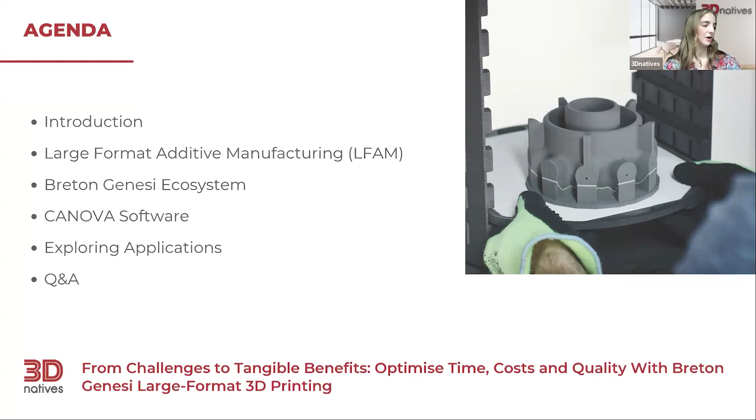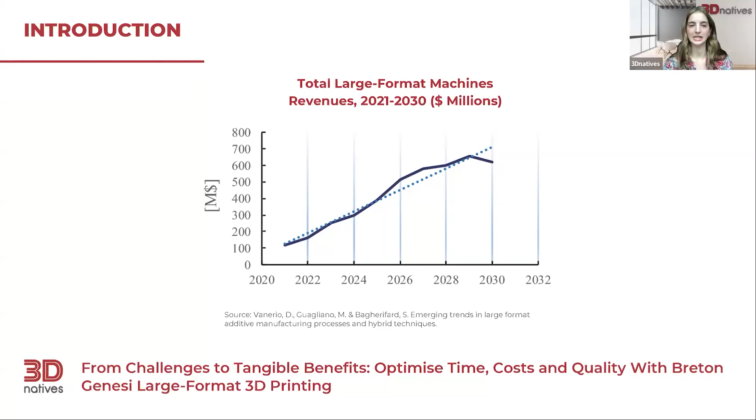Anyways, large format additive manufacturing really has a booming market. As you can see from this graph, the total large format machine revenue from 2021 to 2030 has been growing by the hundreds of millions every year. This is really a technology that's in demand, it's rapidly evolving, and it's applicable to so many diverse industries, from aerospace to automotive to construction. All of these industries seeking large, lightweight, and durable components are turning to large format additive manufacturing. So it's very exciting to be at the forefront of this technology and explore everything it has to offer.

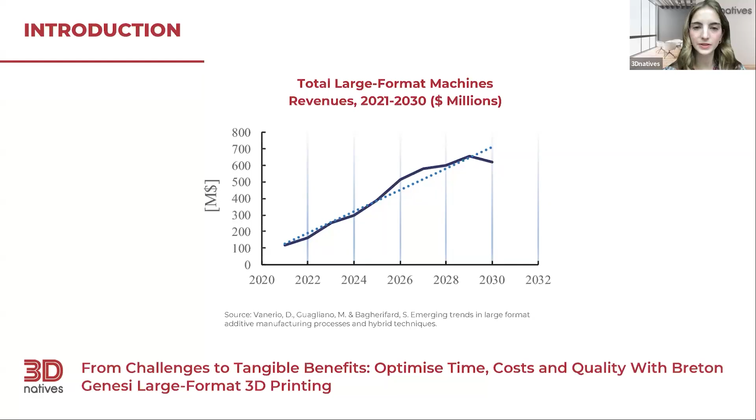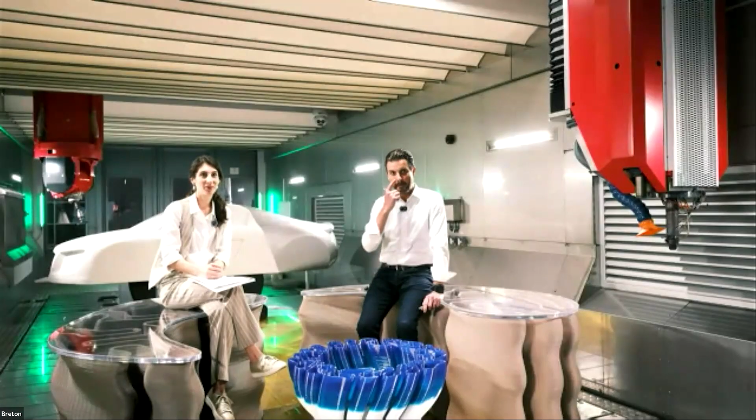Thank you so much, Julia, and thanks everyone for taking the time to be here. Today we're diving into a fast-evolving field that's really catching the eye of the manufacturing world, which is 3D printing, especially in its large-scale applications with thermoplastic materials. But before we dive in, let's go over some common definitions. So what do we mean by large scale?

We define large-scale additive manufacturing not just in terms of size of the machine, but also of industrial applications, part size, throughput, and production environment. It's not only for prototyping, but also aimed at production-ready components. We're referring to additive FDM processes, fused deposition modeling, primarily with thermoplastic pellets reinforced with carbon fiber or glass fiber.

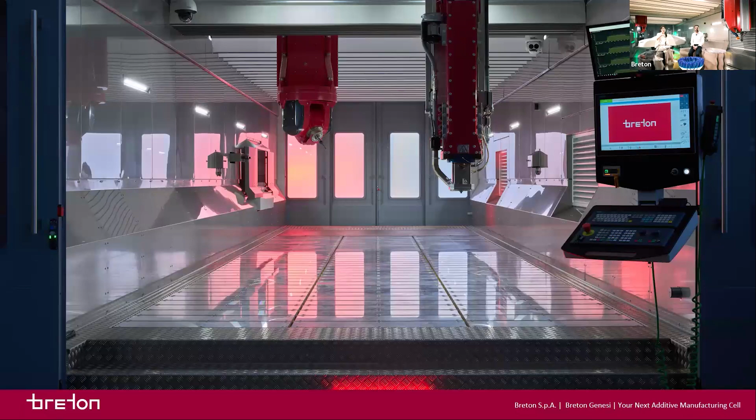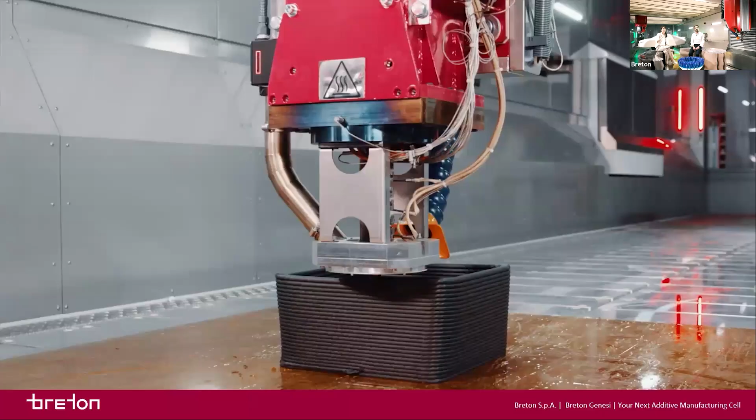We are broadcasting from inside our own additive manufacturing center, which is much larger than the studio I was renting when I was a student. This is our largest 3D printer. It's modular and capable of printing parts with dimensions up to 30 meters long, 5 meters wide, and 2.5 meters tall. The extrusion capability goes up to rates of 200 kilos of material per hour.

We call the system Genesi because we were inspired by the concept of endless possibilities of creation. Breton combines expertise in vertical high-speed machining centers with state-of-the-art extrusion technologies. These systems can be pure additive or hybrid, so additive plus subtractive technologies in the same machine.

This technology is a real game changer in many sectors, from aerospace to automotive, opening up new possibilities for both production and design. But Enrico, could you give us a general overview of the current state of large format 3D printing, and in your experience, what are the main drivers behind its growth?

Thanks, Oriana. Hi, everyone. I'll do my best to provide a good insight into large 3D printing, or LAM, large additive manufacturing, because the demand for these technologies and systems is really booming in several sectors of industry, like aerospace, marine, automotive, precision engineering, and including architectural and design.

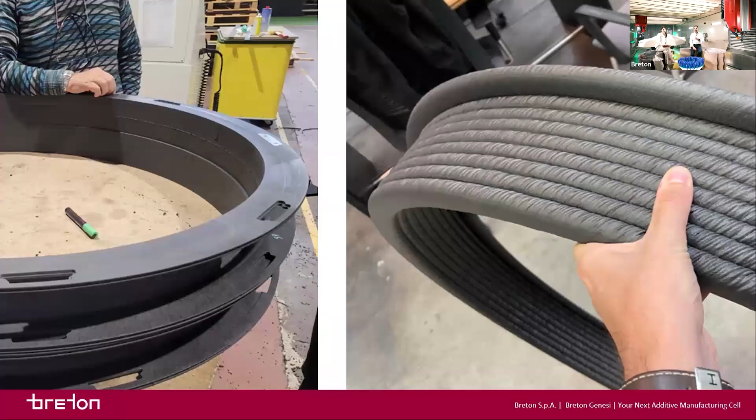Another important point is improved printing quality. With our solution, we are extruding larger beads, like the ones you see now on the slides. This makes the layers more compact and solid, which improves the mechanical properties of the parts and gives better surface quality, even after milling if needed.

Plus, being able to make monolithic parts with intricate geometries opens up new possibilities for design and functionality, particularly compared with the traditional way of producing large parts as assemblies of multiple smaller components, which is quite a tricky job most of the time.

And let's not forget sustainability. Using less material means less waste - this is quite obvious. If I can print my large tooling in-house, for instance, I can also cut a lot in transportation and logistics. All of these aspects are fascinating and full of potential, but sustainability in particular stands out to me as one of the most promising frontiers of additive manufacturing.

For instance, in Breton, we have been actively exploring this dimension, experimenting with the extrusion of recycled biocomposites, such as the ones where we are sitting now. And we will see some other examples later on.

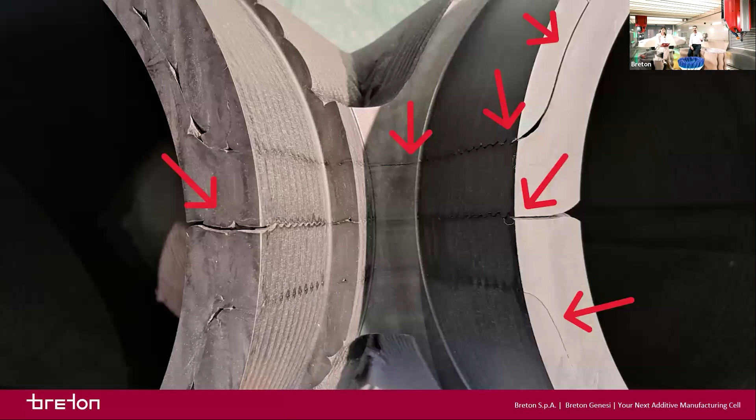Well, you're perfectly right. Despite all the advantages of large format additive manufacturing, there are of course some challenges when it comes to adopting LFAM with thermoplastics. In fact, one of the main ones is managing the extrusion process at a large scale. It's a thermoplastic extrusion process, so you need well-defined and stable parameters throughout the print cycle to get reliable results. If parameters like extrusion speed, temperature, or how the machine handles corners are unstable, you can get geometric defects and lose mechanical properties.

Also, a lot of solutions on the market tend to overlook things like fluid dynamics and temperature management of the deposited materials, often leaving these critical aspects up to the operator's experience, requiring skills that, let's be honest, are not very easily available out there. That makes it quite difficult to bring it to high quality results.

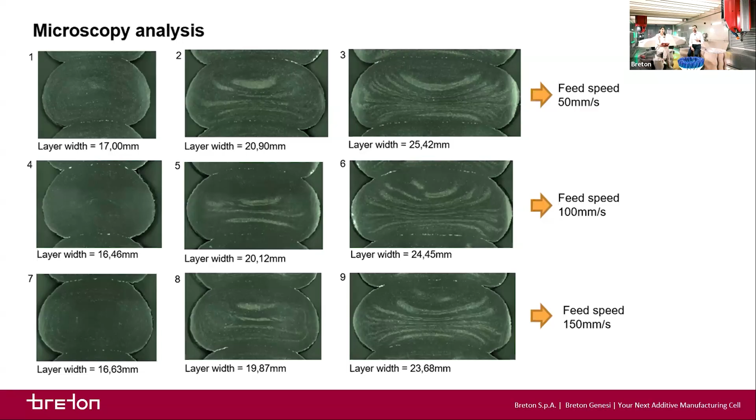Another challenge is also about the preparation and all the phases before getting to the print model, especially in professional 3D printing. It's what we call the ability to make a good design for printing. Designing a mold, for instance, should define from the first input how the machines should behave or how the printed layers should go on the machines.

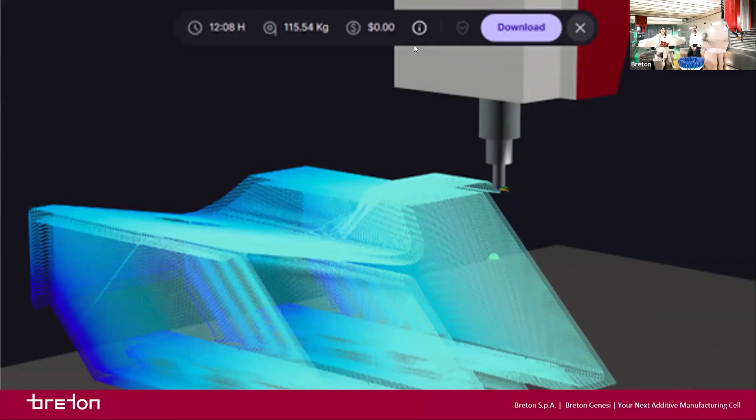And finally, I think it's important to remember that large-scale extrusion isn't just about size or material quantity. It takes also quite a lot of research to produce parts that could be competitive, both in terms of performance and cost. One of the first things I learned in my career is that the process drives the outcome. So it's crucial to manage the extrusion process to get results that are at the same time consistent, high quality, and competitive.

And how does the Breton Genesi solution tackle these challenges that are relevant to so many industries? Exactly, Ariane. Breton comes from a solid experience in vertical machining centers for many different materials, including the most exotic composite materials, and combines it with extrusion technologies at the state of the art. With these joint skills and joint experience, we developed a range of products dedicated to large additive manufacturing with thermoplastic materials. Genesi isn't just a machine or a regular FDM printer. It's what we define as a real ecosystem that integrates machine learning algorithms and advanced artificial intelligence systems, all with the scope to optimize the additive manufacturing process.

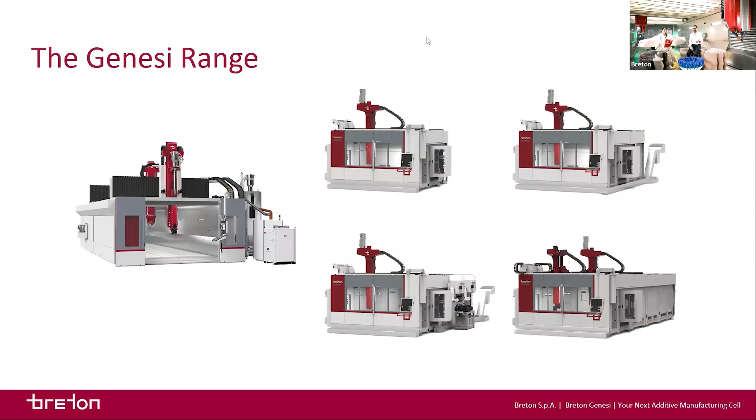So I'll stop you right there because it sounds all very nice, but everyone today is talking about AI and machine learning. So it would be useful if, in practical terms, you could explain how Genesi truly helps to overcome the challenges we discussed, harnessing AI and machine learning for issues like parameter management or process complexity.

Yeah, you're absolutely right. Theory is great, but what matters is how it works in practice, right? So let's go into it and see how the Genesi system works. Let's follow it along with these slides too.

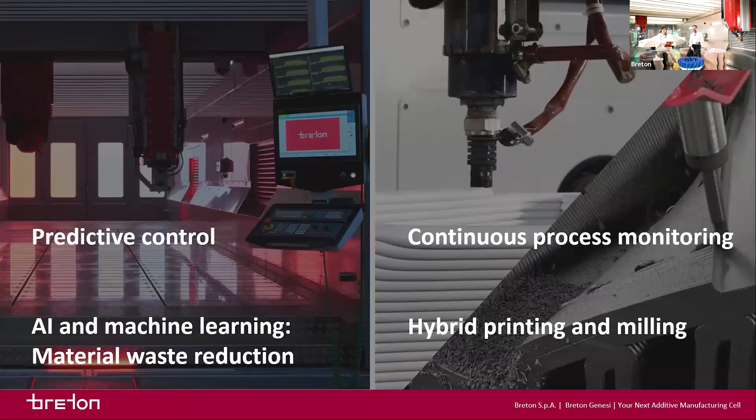As we mentioned, the Genesi system uses artificial intelligence and machine learning to make printing better and more reliable. In practice, this means the machine doesn't just follow the standard instructions from the design software. It goes a little bit further, bringing the experience of Breton technicians and customer print results into the application of new prints. Essentially, Genesi learns how to always get to the best outcome. So even before printing starts, the machine can predict and optimize the print instructions. And if something unexpected happens during the print, Genesi can also adapt and correct the settings on the fly without you having to step in.

Let's look at a concrete example. If you're printing an object and, for any reason, the conditions around the part are changing—the temperature, the proximity to other parts, the humidity, or whatever—Genesi notices right away and automatically adjusts parameters like printing speed, material flow, layer adhesion temperature, and so on.

This way, it always gets high quality results in a stable way without manual interventions. Let's take another example.

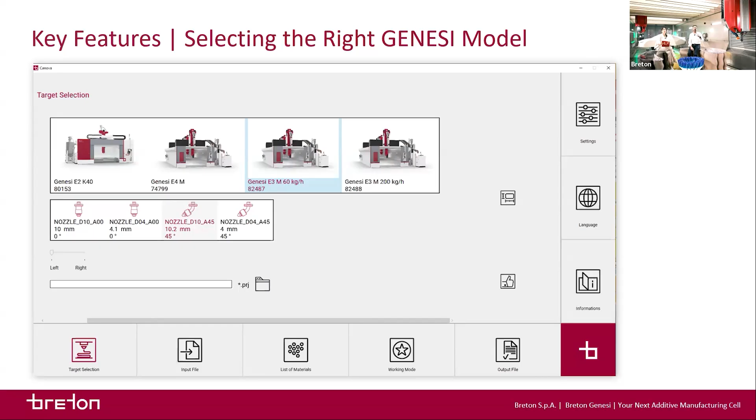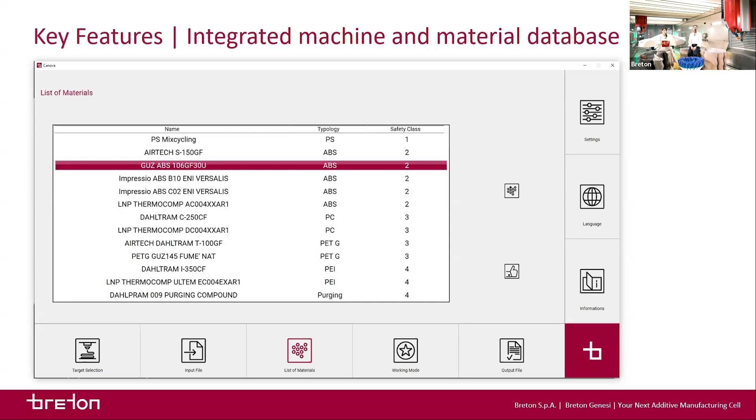How does Canova help the operator? It's really simple, essentially in the form of a wizard that the operator can easily follow. The operator just imports the layer path from the slicer, then picks the material from a ready-made database without losing time defining the parameters because they are already there. The operator also selects which type of nozzle to use, choosing between different sizes and angles that we have, and then the software takes care of everything else.

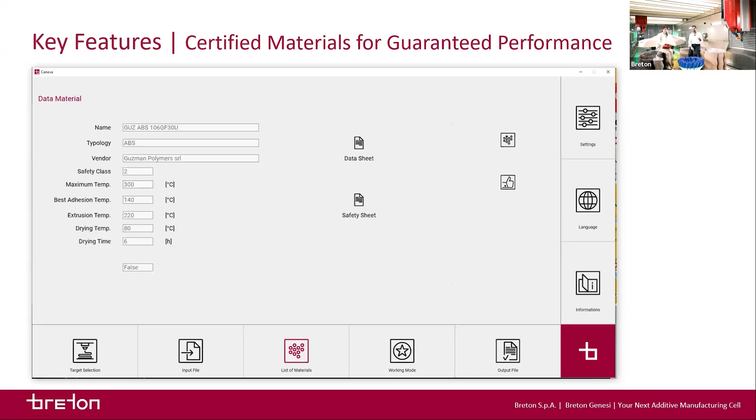Canova automatically sets all the printing parameters using data and tests already done. This way, you can avoid mistakes and speed up the whole process.

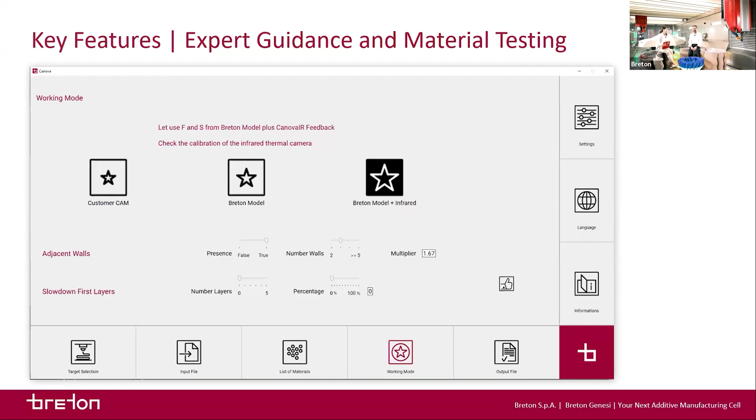What about the kind of materials that can be extruded? We have plenty of them. The Canova database already includes loads of tested and certified materials, which we can see here in the slide too. We range from the easier ABS or polyamide and so on, up to the most complex parts and materials like PEI, PEEK, Ultem, which are quite tricky materials to handle.

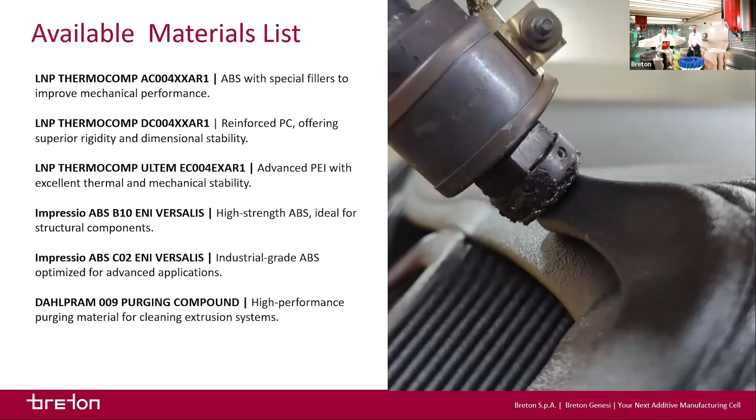But remember, if you need to work with any new material that isn't already in the list, you can easily add it with the help of the Breton engineers. This means the operator doesn't have to worry about the complicated settings, and can focus on the actual print and the result you want to get from the machine.

So basically, the Canova software makes printing simpler and safer and reduces the risk of errors for the operator. And what we like to say here is that size and brain both matter in this case.

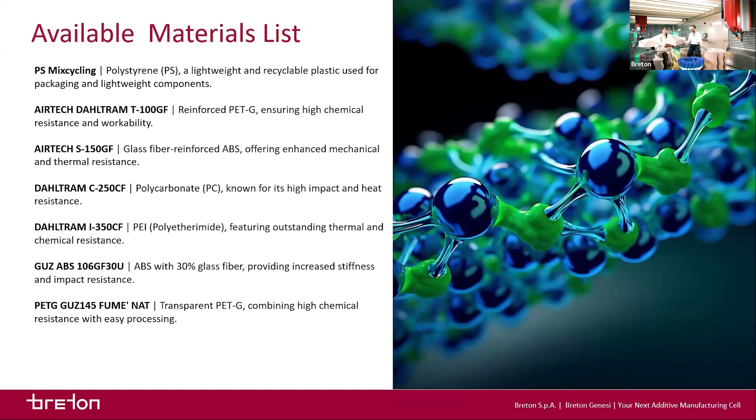Exactly. Thanks to Canova, printing becomes much easier, faster, and you surely avoid the risk of error because Canova contains essentially all our know-how, all the know-how we gathered at Breton during development, but also the know-how developed by other end users who are sharing data within the Canova cloud system that is also available. This know-how is essentially what an operator cannot always have when just put in front of a new machine, so we make his life much easier.

Another strong point for Genesi is that it includes infrared thermal cameras that monitor the temperature in real time and predict layer adhesion. And then we also have a heated bed. This ensures consistent quality and keeps waste to a minimum.

Yes, we are right above the head, as you can see. It's not heated at the moment. No, thank God it's not heated, otherwise we'd be burning here, right?

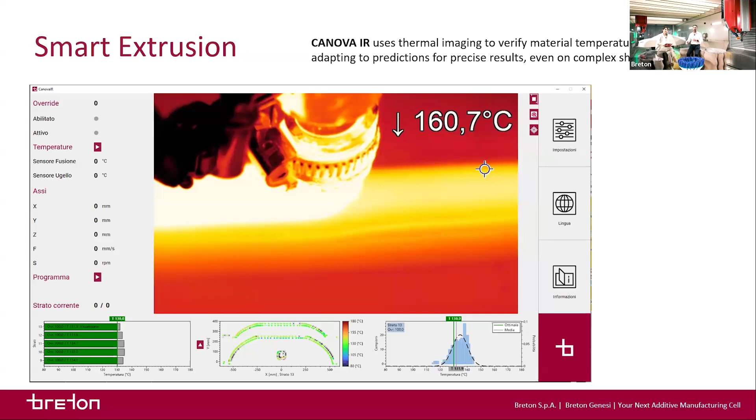And that's not all. Genesi is also available in what we call the hybrid version, combining additive manufacturing with high-speed milling. This lets you go from the idea and concept of the part, throughout the build of the part, and then the machining of the part later on. It's a solution that is perfect, for instance, for who wants to prototype and finish in the same workflow.

A so-called hybrid cell is what we have here around today. It could be, let's say, a sort of little factory within your own factory. In summary, the benefit for operators is ease of use, because the operator is essentially picking up materials from the already existing software database.

It also brings flexibility to the operator, because the operator can add materials to the database, always assessing also the support of Breton. It's important that we have a system to guarantee quality.

The AI optimizes every step, layer by layer, with all the projection forward till the end of the job. A fourth benefit is that we get fewer errors, because automation minimizes operational risks. The fifth summarizes the previous ones, because it brings efficiency in time and material. With predictive control, you can avoid waste and wrong parts, and get to your result better and faster.

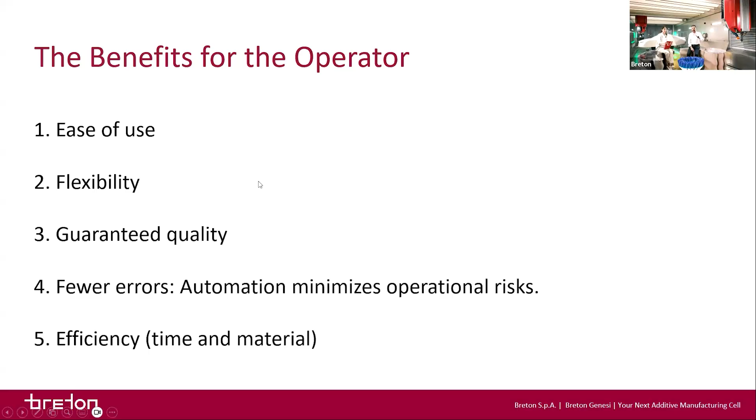Genesi is designed for a range of industries that need to produce larger components with thermoplastic materials. This includes aerospace, which is always at the front end with new solutions, but also automotive, marine, tooling production, energy components, and it could be suitable also for general precision engineering works. The applications may range from rapid prototyping to small batch production of customized parts.

I'll show you some of the parts that we have already been involved in. Starting from the list we just mentioned, we can see parts for the aerospace. In particular, the ability of our solution to exploit at best the printing process with very exotic and tricky materials is opening up the possibility to print directly autoclave-ready molds of big sizes, using complex materials like Ultem or PESU, depending on which temperature the molds should withstand.

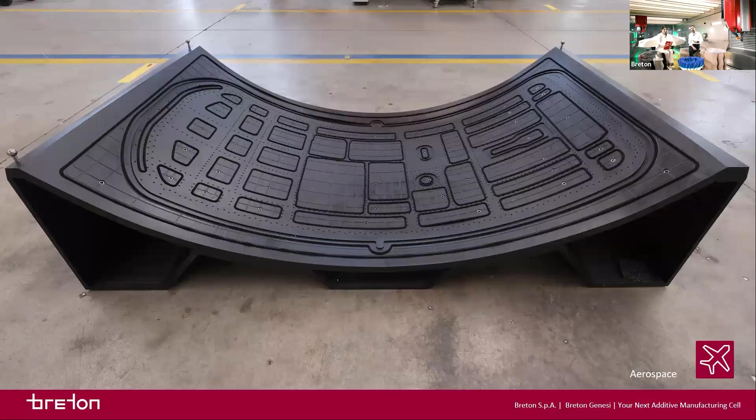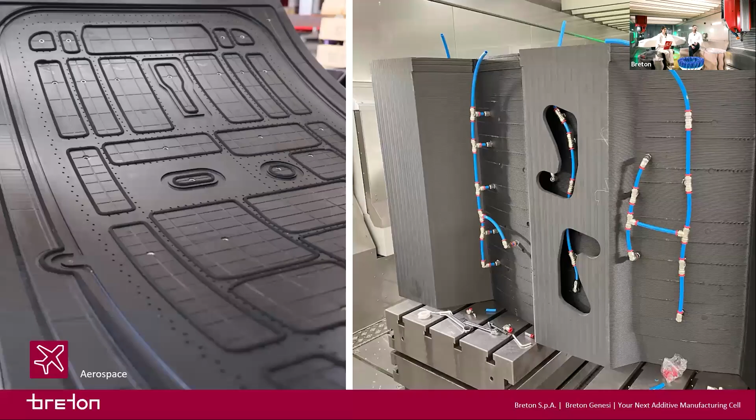For the aerospace, for instance, we're approaching applications where we are called to 3D print fixtures, toolings and work holding systems. These holding systems could be either mechanic clamping or, like the one we're seeing now in the slide, equipped with integrated channels for vacuum holding.

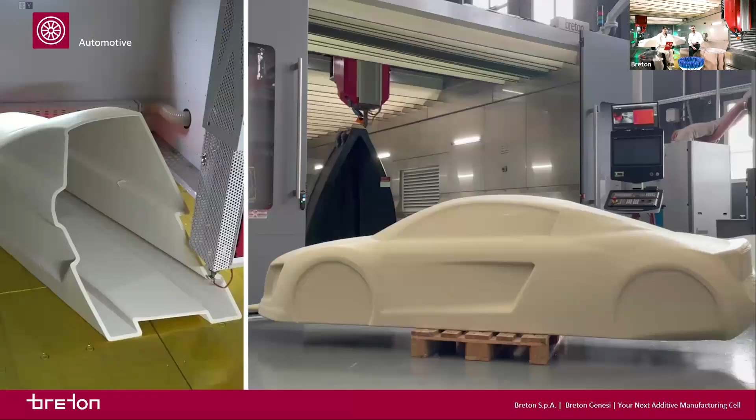If we look at the automotive sector, one of the most attracting points for people interested in a Genesi machine is the capability to print directly prototypes, like the one we have here behind us today, but also shown in the slide. So you can start really from nothing and build up your full-scale car if needed.

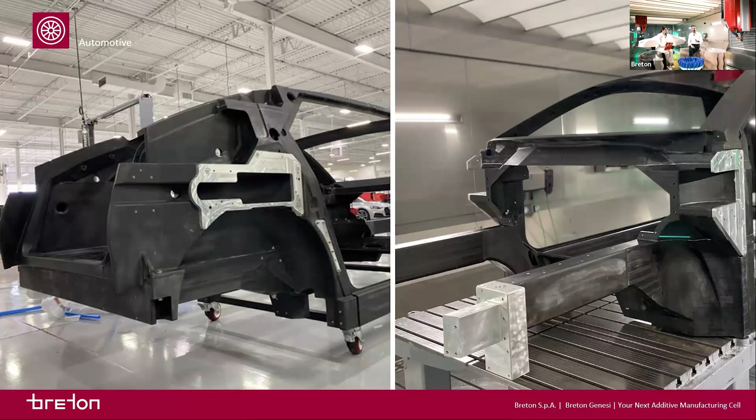But you can also print the components for a chassis of the car. So if you want to make a mock-up car with different sections of chassis where you then put your skins on, the Genesi with its large bed is also a suitable solution.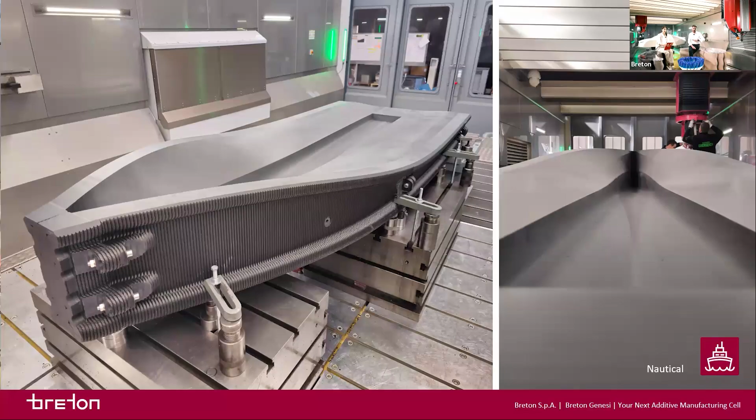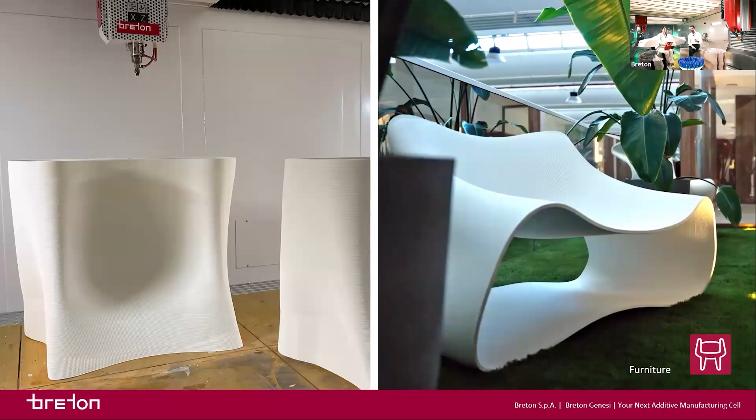We mentioned very briefly the marine sector. We can see here on the screen an example of a lamination mold that we made for a customer producing boats in a smaller series. That's a modular mold, it can be extended in length, and it can be open also at the bow side or the back side of the boat to easily demold the components.

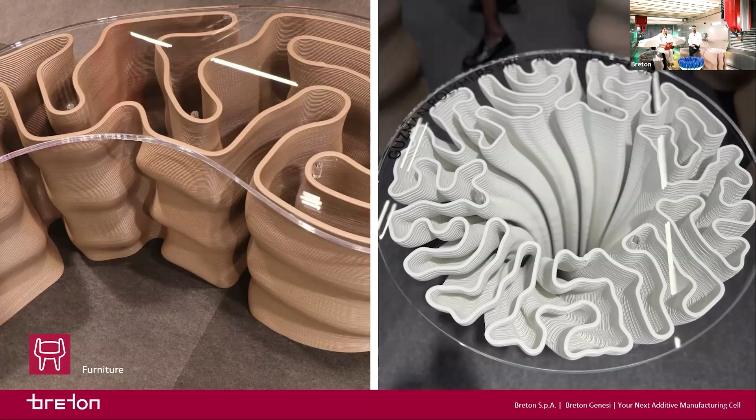We spent also a mention for the architecture and design applications, like those we're sitting on top of today, but also the ones you can see on the slides. Large additive manufacturing is really like honey for designers, who are all attracted by this freedom of designing and obtaining in one go the most bizarre shapes for their part. You see here from a little bit above the parts we're sitting on today, the benches, the table, and other interior works made available with our 3D printers.

We presented also last year a very innovative way of producing kitchens. We've been printing in one solid block all the kitchen desks. It also integrates the ceramic top on it and all the other sinks and utilities.

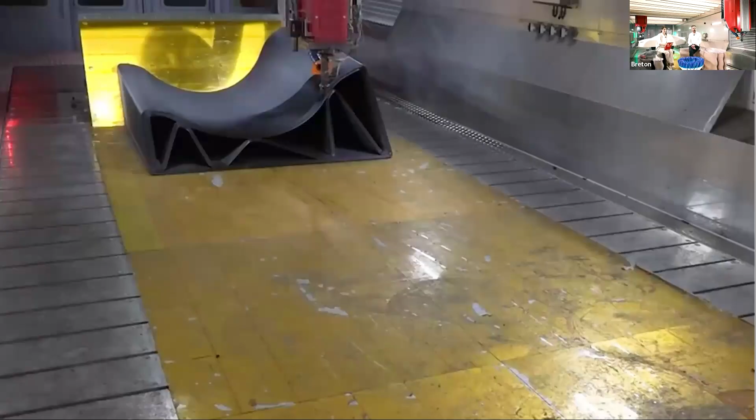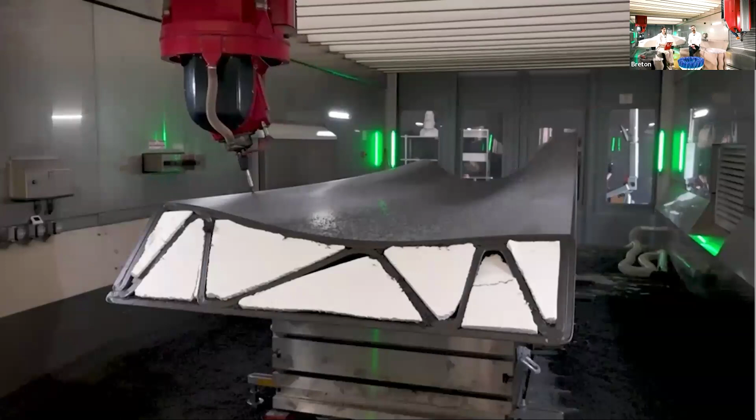Let's see, for instance, a video of a print. It's a bit sped up now, but when it slows down, this is the real speed of the machine when printing a mold like that. That was a mold approximately 7 meters long, 3 meters wide, and about 1 meter at the top highest point.

After the print, with the same machine we're here with today, we've been doing the milling of the upper surface, including the surface finish—the polishing and sanding of the upper surface—to make it in a way that they can then apply the release agents straight on and go directly into the autoclave without any extra operation. So it's fascinating, all these possibilities.

To sum up, Breton Genesi is a cutting-edge solution for large-scale 3D printing, standing out for its integration of artificial intelligence and machine learning, which ensures a predictive, consistent, and high-quality process.

And its versatility with both pure additive or hybrid versions, plus the simplified workflow, open up new opportunities for various industries, making the use of this technology very efficient and very sustainable. Yeah, absolutely.

But that's not just me saying that. I'm essentially quoting the words of the different end users of our solutions, and also those of the people that have had the chance to witness Genesi in action.

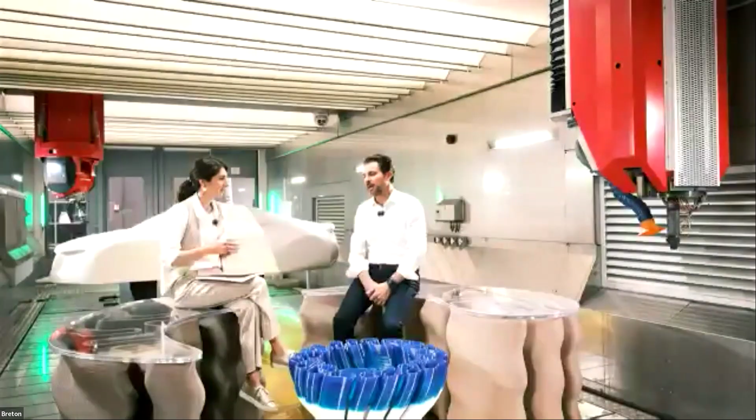So at the moment it's used more for design and furniture applications. We are trying to print - don't have the final result yet. We are trying with PETG as well, and old jeans fiber. We got other materials that are embedding recycled fibers from denim, so they give a texture like jeans.

So it's very early - for now we haven't reached the stability and quality needed for structural parts for aerospace or automotive, but I think we will get there.

Even polycarbonate is something that is quite commonly available in a recycled version, depending if it needs to be reinforced with fibers or not. But those materials you will find already in the database of the Canova software. They've been already used in day-to-day jobs, so they're there. This is just the beginning, and it will grow in the future.